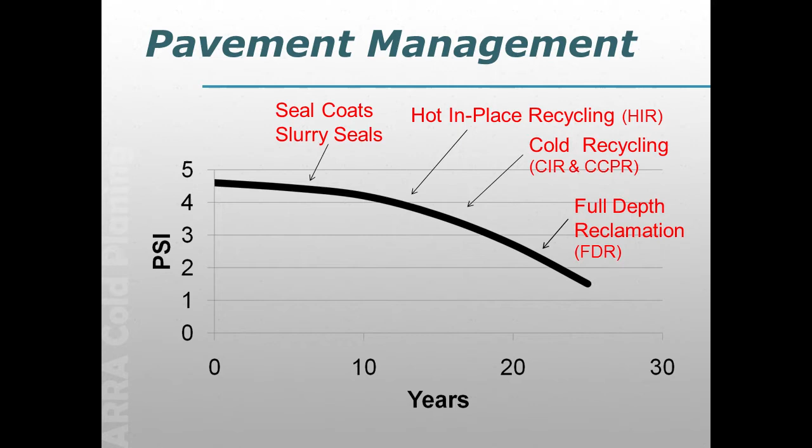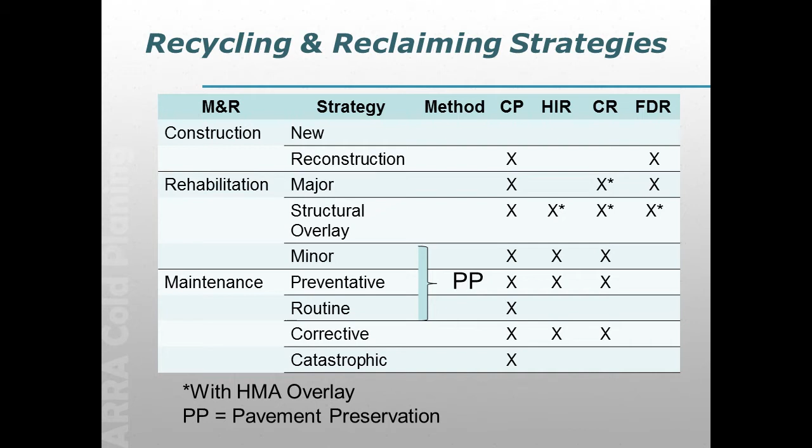Where do we fall in the pavement preservation category? Well, this is kind of a thing we got from the FHWA and then added our techniques. And so you can see that hot in place and cold recycling fall under pavement preservation. So you can use your pavement preservation funds for these. Unfortunately, FDR's getting into structural overlay and major reconstruction, et cetera, and doesn't typically fall under the pavement preservation curve. But our hot in place and cold recycling do.

Why might you want to do these? Well, we see reported cost savings. That's probably closer to 20 to 50% cost savings. And it depends upon a lot of things, and it depends on what you compare it to. But compared to your conventional maintenance and rehabilitation techniques, and depending on your market, you can see some substantial cost savings on some of these.

The other thing is these processes are quite environmentally friendly. And realize that no one's going to pick a process just because of that, but we're going to reuse 100% of the existing materials in place, and generally have reduced binder consumption rates because of this. With some of this stuff you can get some incredibly reduced trucking cost, especially if you're working in an urban area. That can be really important.

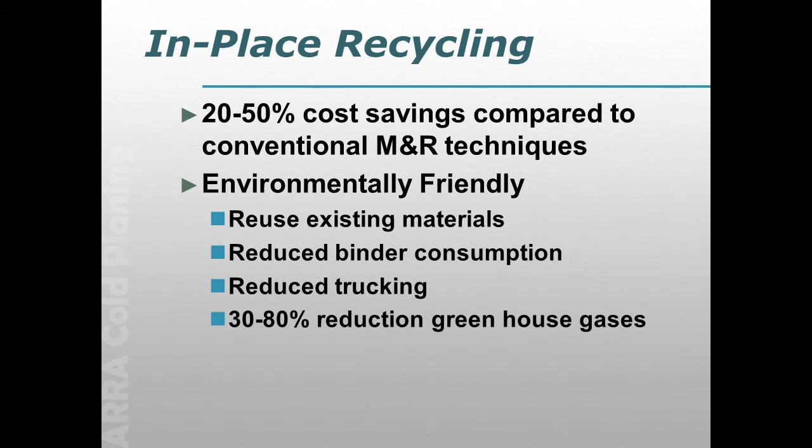And we've seen several studies coming out. Maryland just did a real good one comparing hot mix with cold in place and cold central plant recycling, but reduction in greenhouse gases of 30 to 80% is pretty common depending upon which process you might be using.

But what I really wanted to talk to you guys about is some of the stuff we've done at ARRA to try to educate the public. One of the biggest things we hear about our processes is we don't know a lot about it, there's not a lot of contractors, etc. I guess I will say Montana brought up the thing about the contractors. If you build it, we'll come. If you build a lot of them, we'll stay. So keep that in mind.

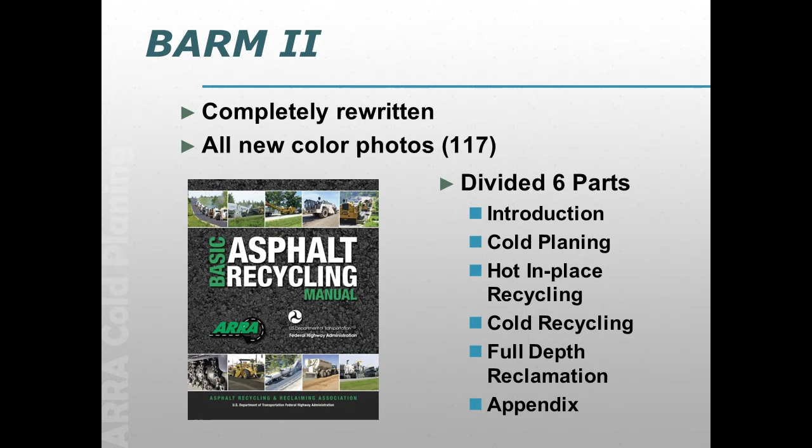But we put out the basic asphalt recycling manual in 2001. It's been around for a long time, 14 years. It's actually been published in Chinese and in Spanish. But lots happened in the last 10 or 15 years. There's been a lot of improvements in materials, equipment, test methods. So we decided a couple of years ago it was time to rewrite this thing. So it just came out recently. It was completely rewritten. It's all color photos, 117 photos, divided into 6 different parts covering our major things.

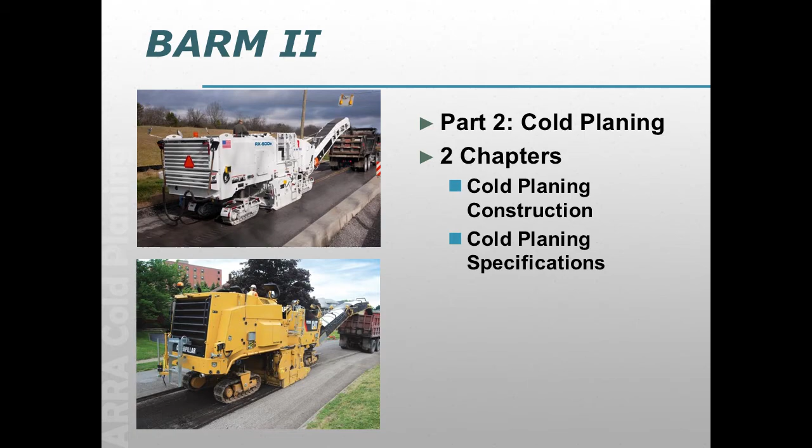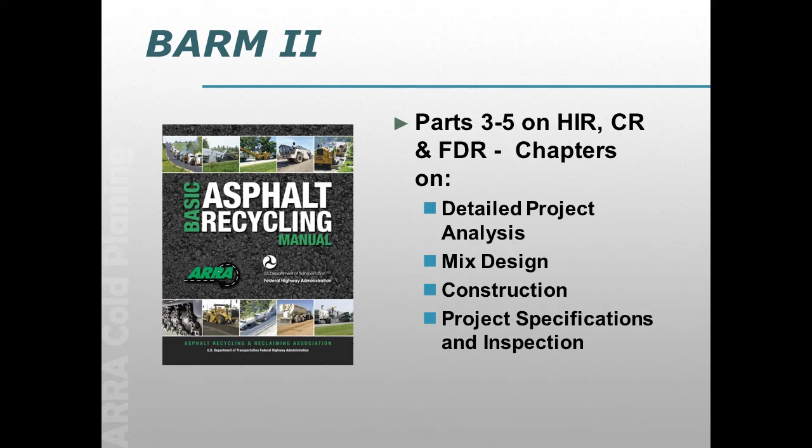Got a couple of chapters on cold planing where we talk about just construction and specifications. And then with hot in place, cold recycling, and FDR, we have 4 chapters each where we cover detailed project analysis, mix design, construction, project specifications, and inspections. So there's a lot of questions we had on hot in place recycling, and I'm gonna give you a plug. You could have answered every one of those by looking in the BARM, okay?

What they did in Denver was the repave method, and the thing about that is they put an integral asphalt overlay on it at the same time they're doing the hot in place, so they're compacted as one material. But there's also a remix process where they might add a little new material, and there's simple surface recycling that's been around for a while. But again, we'll give the plug. If you guys have questions on that, come by and take a look at the BARM.

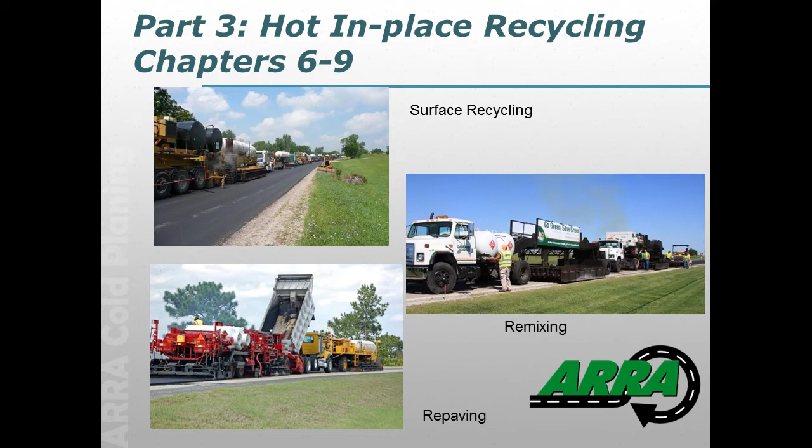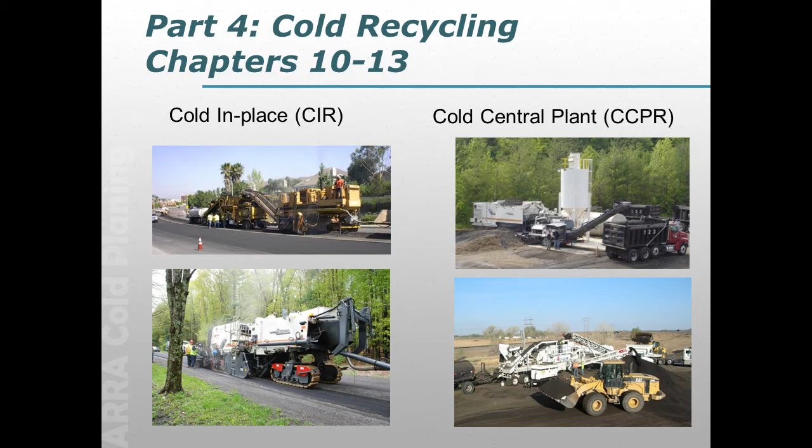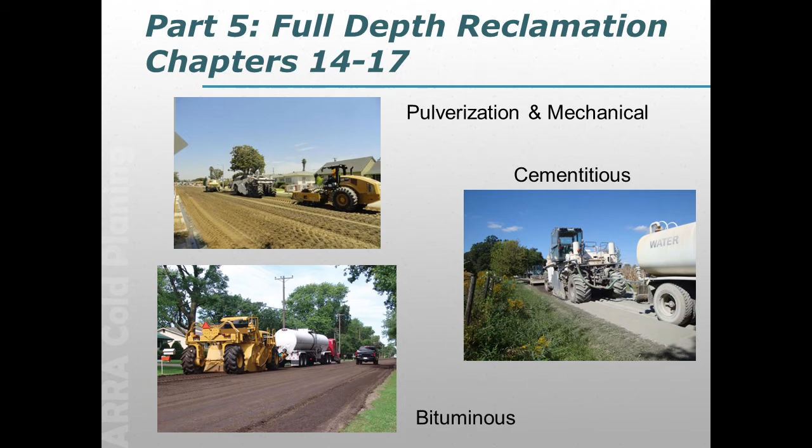We cover cold in place using the single unit train, multi-unit train, cold central plant. I get one of the big kicks out of cold central plant: most of the cold central plant is done by simply parking the train in a stationary spot and running it through that way. But we go into that. We cover full depth reclamation, simple pulverization or mechanical, bituminous, and cementitious, which is by far the most popular method for FDR.

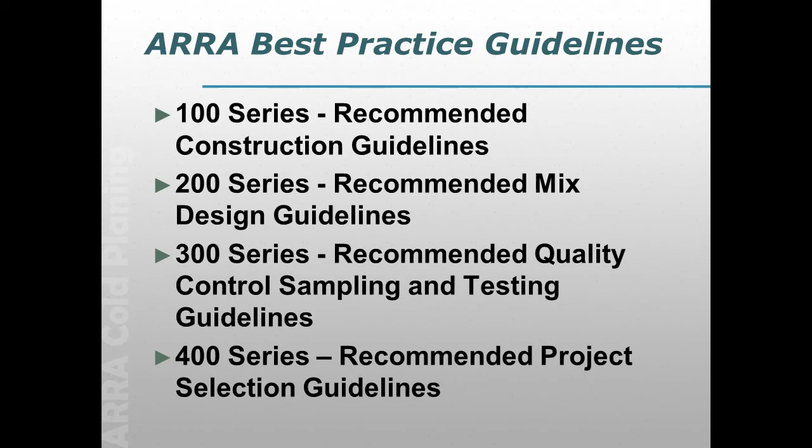So I'm going to chide a couple of people, but I brought some of these and set them out as a demo. The reason I set them out as a demo, we just had our big meeting last week, and we revised all of these. So somebody grabbed a couple of them. Please come back, give me your name and email, and in about 2 weeks, I'll be able to send you the revised version. That's why I didn't bring out a bunch of extra copies. These are all undergoing revision. So if you're interested in these, I got a few of the copies there. I can show them to you, but I want to get you the new revised versions. So come by and see me.

You can also, in a couple of weeks, download the revised ones off the web page. So if you go to our web page at arra.org, go to resources, down toward the bottom, there's a thing on guidelines. You can click on that, and you can download our PDF of our guidelines, or give me a holler and I'll send them to you. Either way.

A couple other things that are out there for training and stuff. We have developed 3 classes for TC3. The cold in place recycling has been on the web page for over a year. I just finished the final draft of the hot in place recycling, and it should be available soon. And they just sent me the FDR one to do the first review of the draft. So I'm expecting the first of next year those will be out there. They're on the TC3 website.

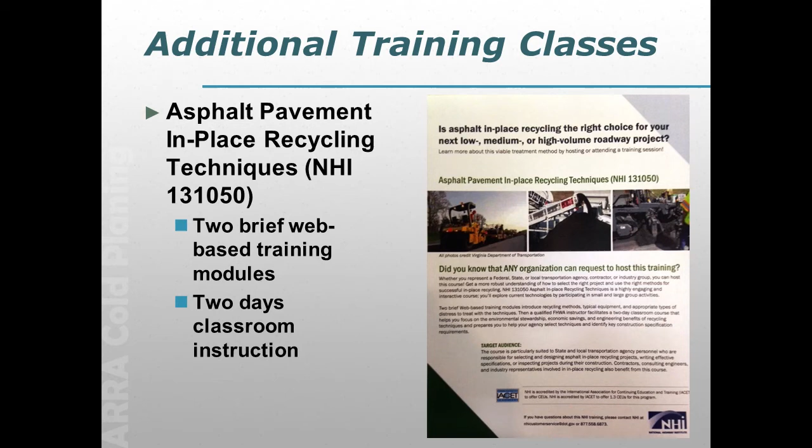Again, so coming up. As far as some additional stuff, there is an NHI course that FHWA put together on in-place recycling. It's 2 brief web-based training modules and then a 2-day classroom instruction. Anybody can host one of these. I've got a flyer at my desk if you want some more information on this.

And this is a new one that ARRA's decided to do. We've tried to put on workshops. People can't travel, they don't have funds. So we decided that if you're interested and want to learn more, we will come to you. We'll come to your agency. We'll come to LTAP center, whatever. You just let us know. And we are developing 1-day classes on cold milling and hot in place, cold in place, and FDR. We envision these as 1-day workshops. We'll cover whatever you want. We can do 1 of them, 2 of them, or give you all 4 of them.

But if you'll get with me or Jason Dietz, we'll be glad to talk to you about getting this set up. Larry is working on a cold milling class for us. So these things are out there. We're trying to get these set up, and realize with travel budgets, it's probably going to be a whole lot easier for us to come to you than the other way around.

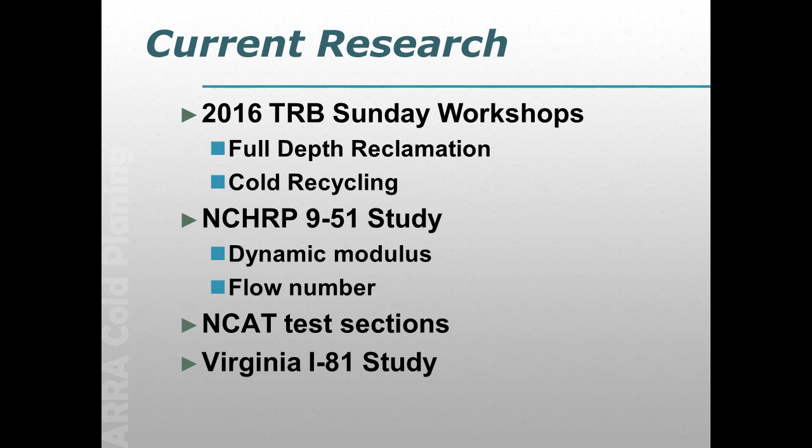Current research, they asked real quick. If you're going to TRB on Sunday, there's 2 workshops, one on full depth reclamation, one on cold in place recycling. The 9-51 NCHRP study that's done by Maryland and Brian Diefendorfer with Virginia DOT is doing a lot of work. Some very interesting results coming out on FDR and CIR. And we've had a couple of test sections down at NCAT. And Virginia put some of this on I-81, a heavily trafficked pavement, and it's working really well. So some things you can find.

They asked for needed research. What can you guys do to help us? We really need to document the performance of this. There's just a lot of scattered performance data out there on how well this works, and we could really use that. We continually hear about field tests to determine adequate initial curing and better quality control and testing protocols. The kicker on that one, though, is this is a time-dependent material a lot of times, and that causes some issues. So, I went as fast as an old boy from Texas can go.

If you have any questions, I don't want to get into the break too long. No, it's okay. I'm back over there with the little booth, or that's my contact information. Stop by, and like I said, the guidelines, you can download them off the web, but I'd kind of hope you'd wait a couple of weeks till we get those updated, and I'd be glad to get them to you. So, thanks for your time. Any questions?

Everybody wants to take a break. I'll get over to the booth as fast as I can. All right, thank you.